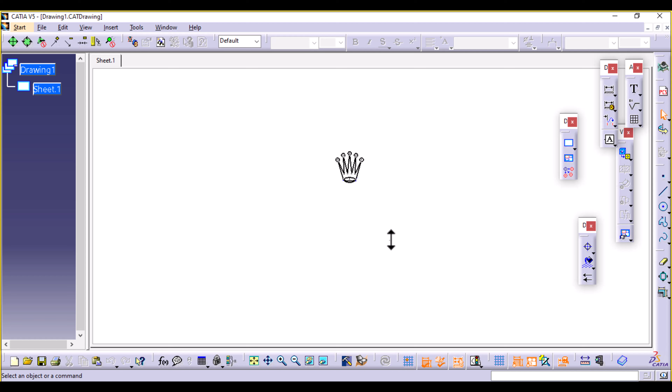So stick around. You're going to open the clasp safety cover. We're going to start there. And we're also going to open the drawing file that we created when we were creating the crown. If you cannot locate it, I would advise you to go back to that tutorial and redraw this.

But if you have it, let's just dive right into it. So here's an image of an actual Air King model. This is the oyster clasp. As you can see, we have this raised part that we need to add. We have this groove and we have these writings which are engraved, as you can see here. And we have Geneva Swiss made. So we're going to make this.

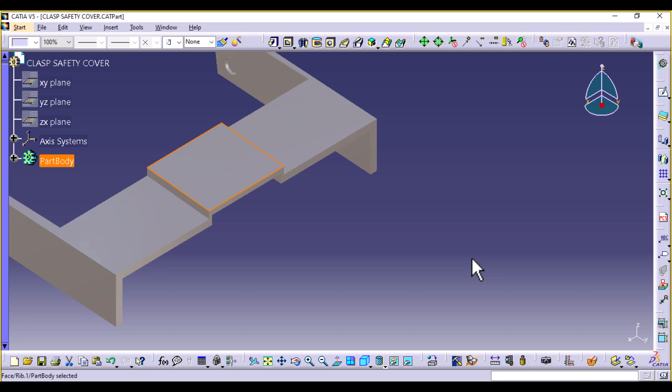Let's start with the safety cover. Now this surface is where we need to make that sketch, but this surface is not planar. If you remember, we created this profile and then swept it over a curved surface. So this surface is actually curved, but you can't see that because it's just a small part of it. And if we need to sketch on it, we have to create a plane here which is tangent to that surface at a particular point, and we're going to make a point in the middle. So I need us to switch to the generative shape design workbench so we can do that.

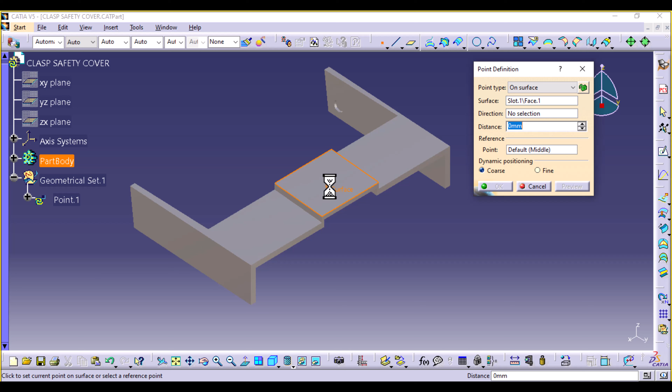We're going to start by creating a point on surface, and you're going to select that surface. Create a point in the middle and select distance to be 0, then select OK. And then we're going to insert a plane tangent to the surface, at this point, and select OK. Now you're going to hide the point.

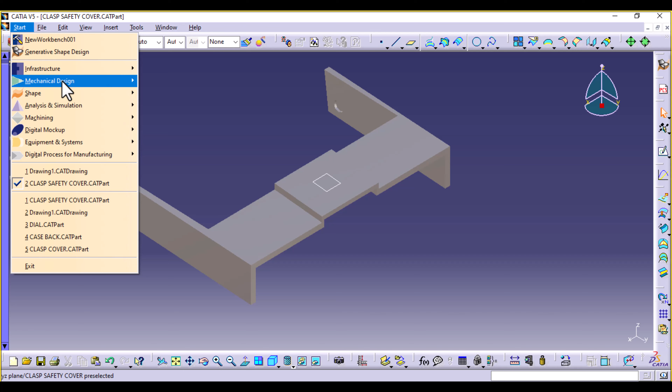And then we're going to switch back to our part design module. Right click on part body and define in work object so that now our new elements are going to fall in part body. Now select this plane and sketch.

Now this is where we're going to paste that crown from drawing 1. So go back to drawing 1 and highlight everything, right click and copy. Go back to the clasp cover, hover over the plane and then paste. Then if you select fit all in, you can see where the new sketch is, and then you can just click on it and drag it all the way close to where our object is.

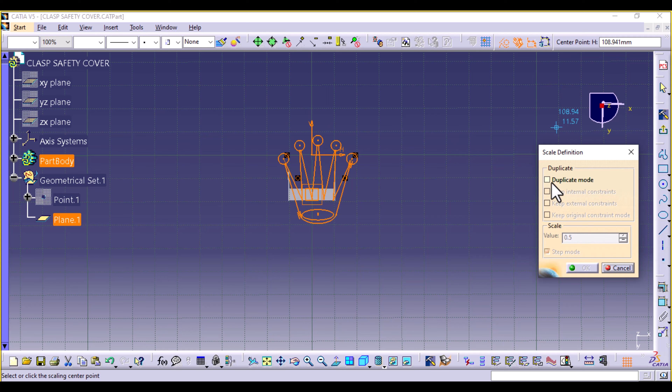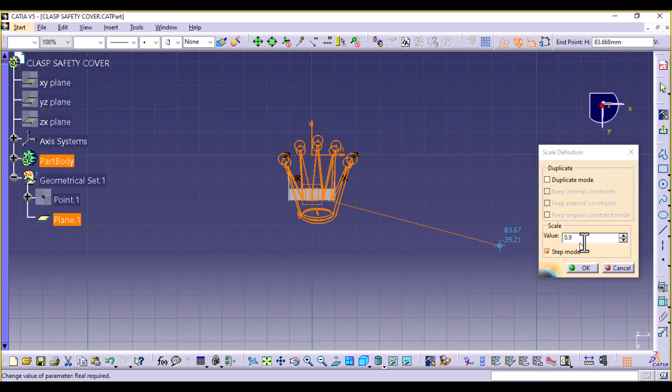Obviously it's too large, so we need to scale that down. You're going to select scale from transformation. Make sure the duplicate mode is deselected, otherwise you're going to end up with double of your sketches every time you perform a scale operation or a rotate operation. Now you're going to select a point where you want your new element to be, and you can scale that down. I'm going to go with 0.9. I can increase it later on if I want. You can see you can drag out and in to select your value, or you can come here and enter your value. In this case, just 0.9.

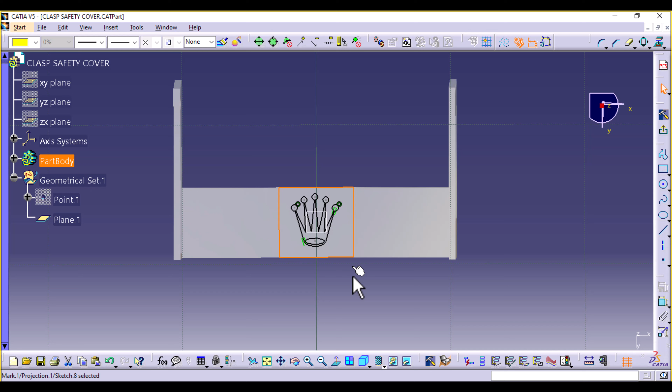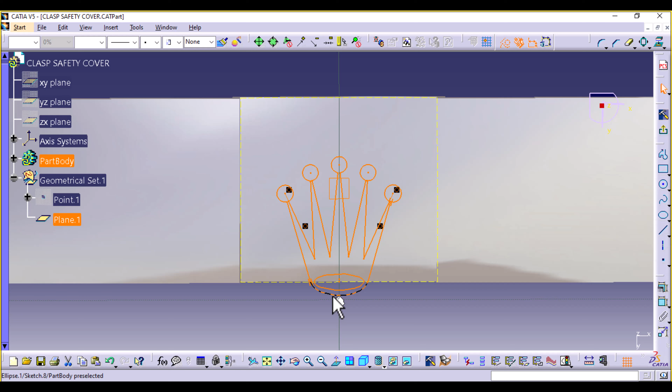Now let's zoom in. So this is the surface where we're going to put this crown. I'm going to project this as a construction element so that we are able to see its boundaries. This is a construction element like so. And then I can now select the sketch and drag it out. So there's just a small portion of it which protrudes outwards, and that is this half ellipse, but it's the only one that's going to be outside. And then there's a bit of distance left on all these sides. I actually think this is good enough for me.

If it's not, you can use scale again to go up and down until you're satisfied with what you have, and then you can exit the workbench. Now I'm going to hide this plane.

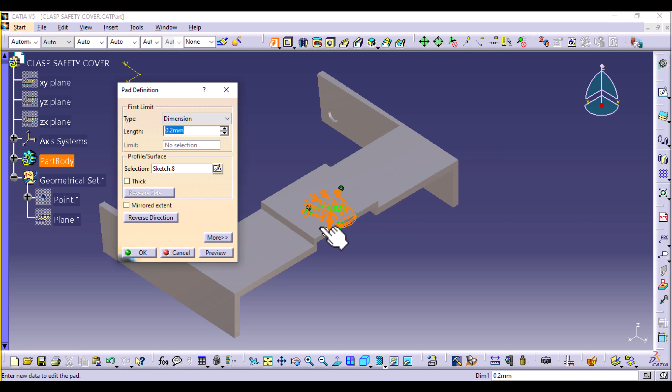And then we're going to create a pad. The length is going to be 0.2, and this is going to be your sketch. Make sure the direction is going upwards, not downwards. And then select OK.

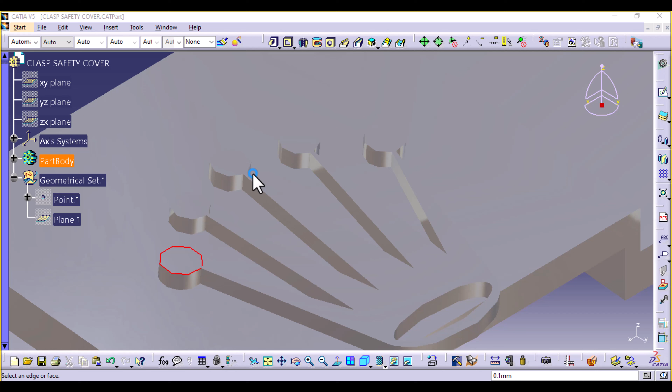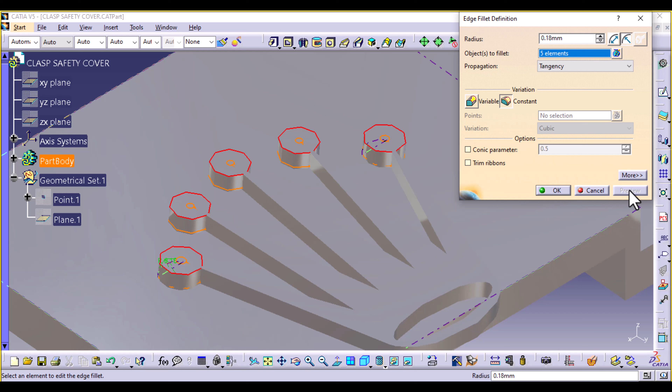0.18, we're going to go with radius, not chordal. Preview. Let's try that. And voila, we have that.

If you're able to add more fillets, you can, because they need to look as rounded as possible. But you have to understand that this is quite a very small feature, so it might prove difficult to create those fillets.

Let's try this one, these 2 sides. Let's say 0.01. Make that chordal length, and then trim ribbons. Preview. Select OK.

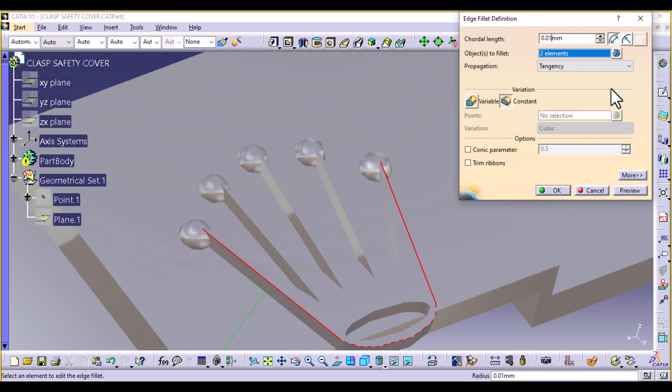If it can't go 0.01, then there's no point in creating the fillets. Okay, we're just going to leave it as it is actually.

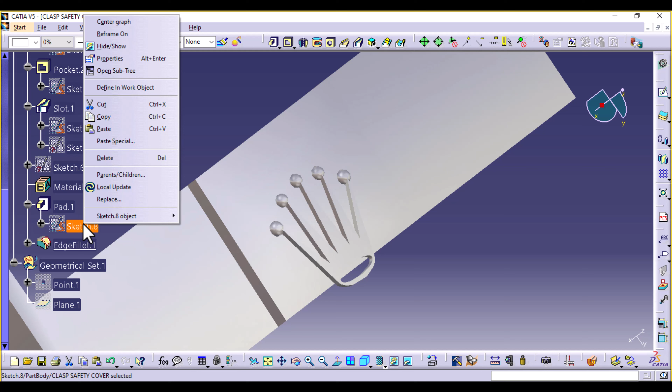Now, one thing to note is that it's not completely hollow, so it's like we have a pocket here. So we're going to select that sketch once again, sketch 8, copy and paste it once again in part body so that it comes here as sketch 9.

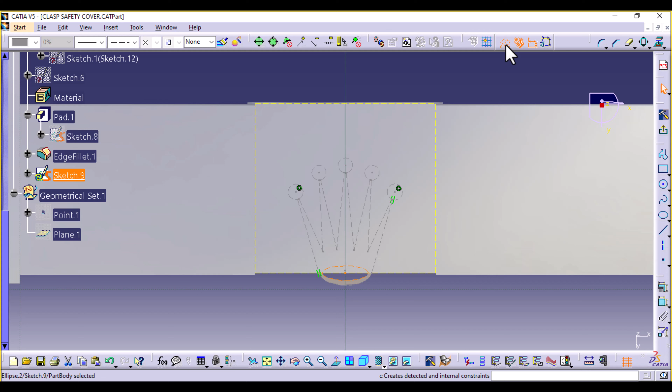Double click on it. You're going to highlight everything and make that a construction element, and then select the ellipse and only make that a standard element. Then exit the workbench, then create a pad, reverse the direction so it's going upwards, and then

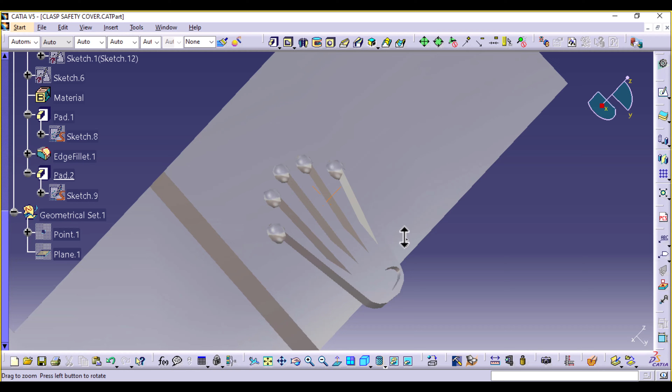there's going to be 0.1 so that it appears like we have a small pocket. Nice. I'm actually going to leave it as that.

If you're able to apply more fillets to these sharp edges, you can do that, but that's fine by me. So this is the part you use to lift off this safety cover and to separate it from the cover, as we saw when we were creating the assembly.

Once we close, it's hard to see where what ends and what starts. So you're going to save your work.

And then we're going to go to the next clasp cover. So you're going to File, Open, Clasp Cover.

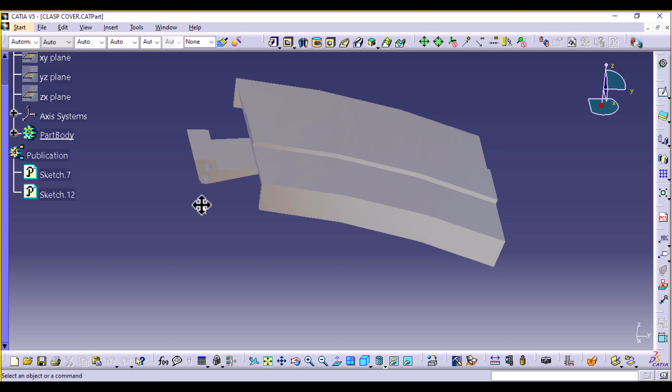The job is pretty simple. We just need to select this face and sketch it.

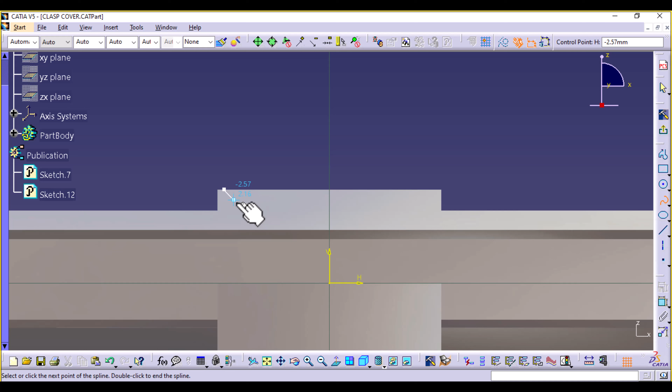Select spline. You can zoom in. And then close to the end, you're just going to click right there and create

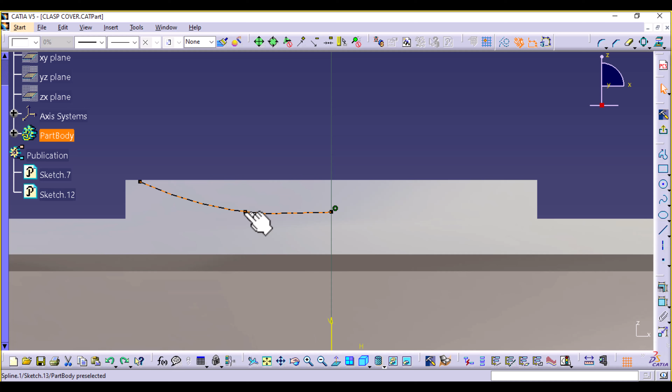a profile like so. Escape. I'm going to raise this so it's a little bit upwards.

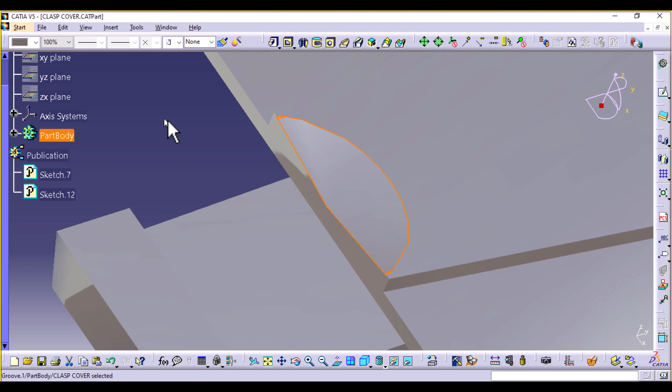and groove it for 360 or 180, and then select OK. And you should have that groove where now that raised logo is going to sit, so that you can have access when you're opening the safety cover. That's pretty simple.

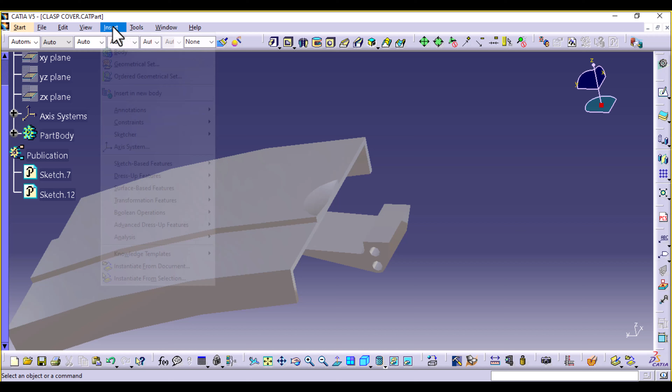So for both of them, you're going to add some fillets to the sides. Insert edge fillet, and I'm just going to select—I'm not going to select this side, this corner. I'm just going to go with these bottom ones and the sides.

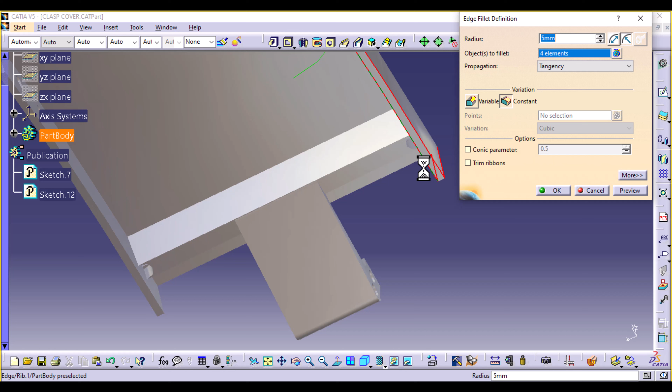The sides. And we're also going to select the front and the back. The side ones are the length, this corner is the only one we're not going to select.

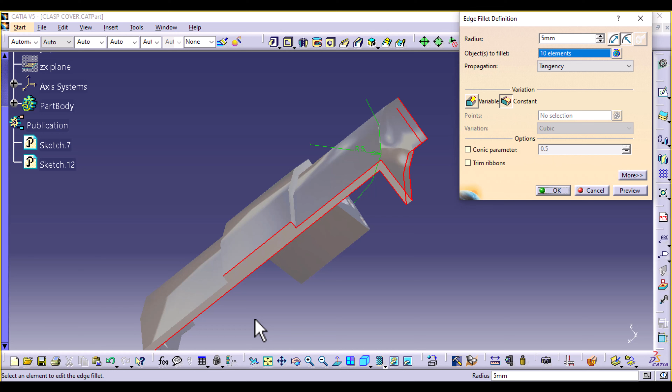But all these other ones, just select.

Make sure you're selecting the edges and you don't select any face. You can confirm that from this list of elements.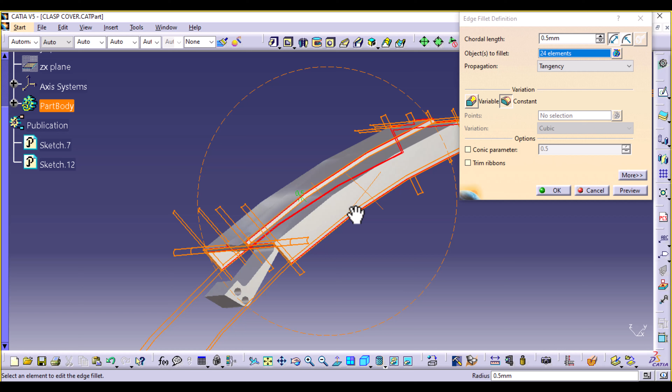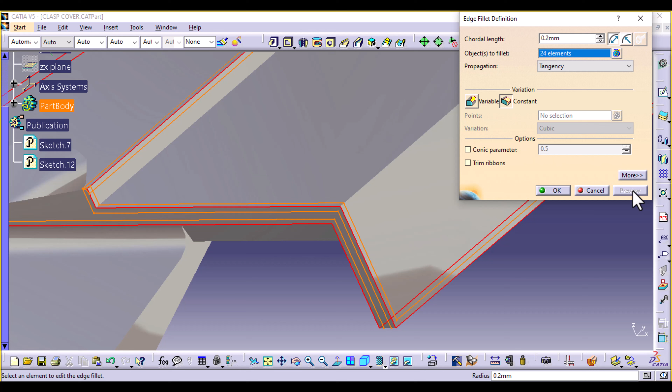Let's start with 0.1. You can zoom in to see how much you're filleting. 0.1, let me see 0.2. I'm going to go with 0.2 because they need to look rounded.

We need smooth rounded edges, and we're going to do the same for the cover, the safety cover. So save this.

So for this one as well, we're going to do the same. Insert, select edge fillet, and then select once again all this front. That's a face, I'm going to undo that. Okay.

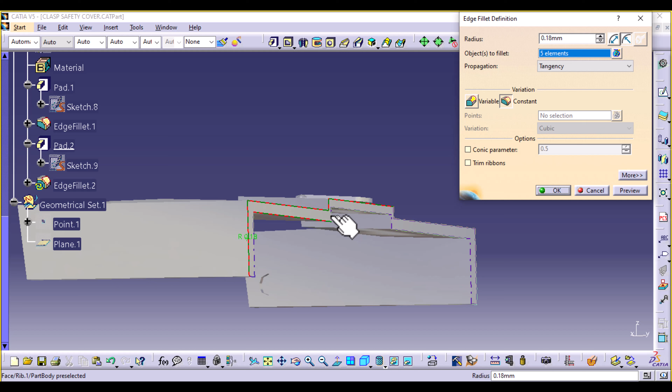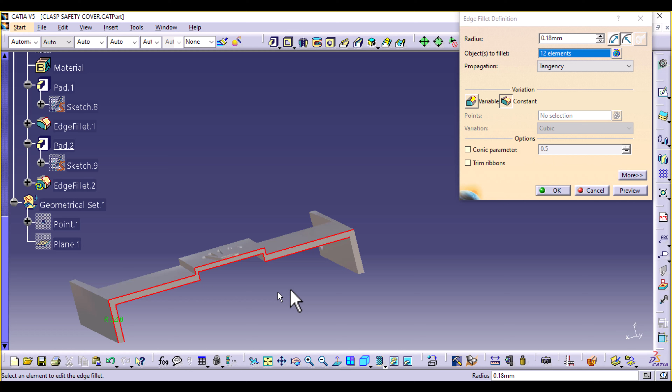You can fast forward this part if you want. So we got the front part. Let's select these edges at the bottom. Then go to the back and select these height edges.

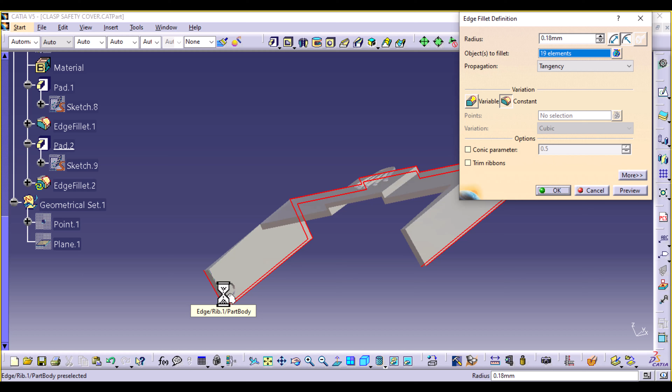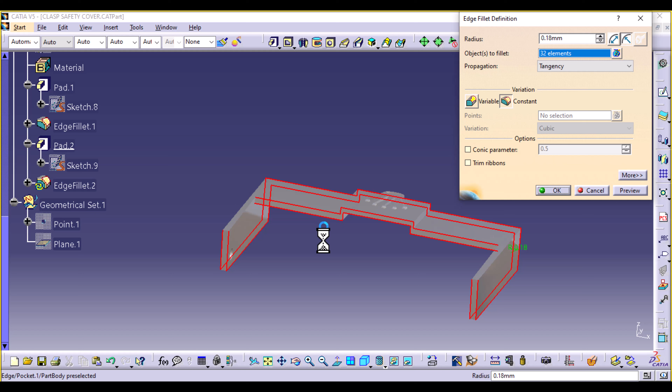All right, I'm going to go with those. So once again, it's 0.2. You can zoom in to check. And then select OK.

Let's try 0.15. I don't know if there's something I've said. Oh, let's select chordal length instead of radius. And tie that point 2 once again.

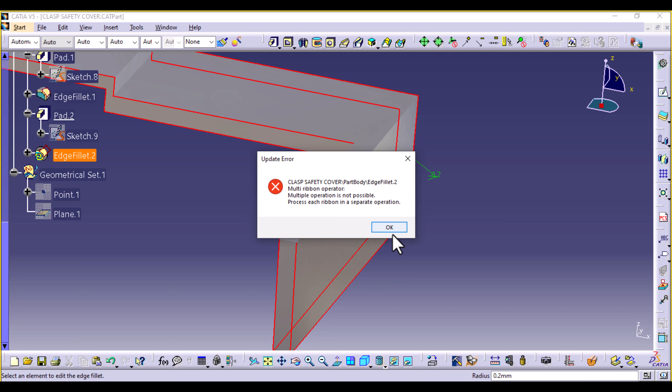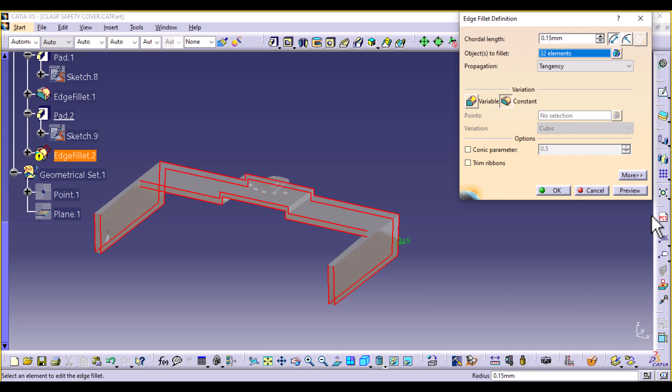I'm pretty sure I've selected the edges only, don't know why it's not working out. So 0.15 chordal length. Okay, that's worked. 0.15 worked, and it's looking good. So save that.

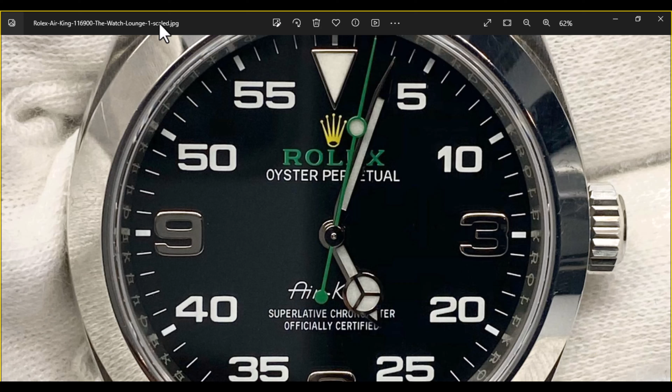Now for the middle case, we have the word Rolex going all the way around. I don't know if I have an image of that, let me check and pull it up. So I've got this image here, and this is what I'm talking about. We have this Rolex word going all the way around the complete circumference, right above the dial, between the dial and the crystal gasket on the middle case.

So let's do that. We cannot find the exact font, but we can find one that looks pretty much alike. On this drawing, you're going to select text and then select a point, say about this point. All caps, you're going to write the word Rolex, enter.

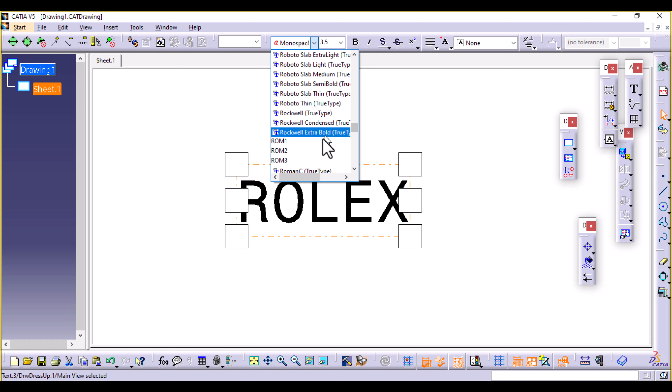And then we need to change the font to something which looks similar to that. So you're going to select Rockwell, Rockwell True Type. And then you're going to save this as an AutoCAD drawing, select DXF and save.

Now if you go to File and open this drawing, you can see this is now an AutoCAD drawing interchange instead of a CATIA drawing, so DXF. If you open that, it should convert the word to a sketch.

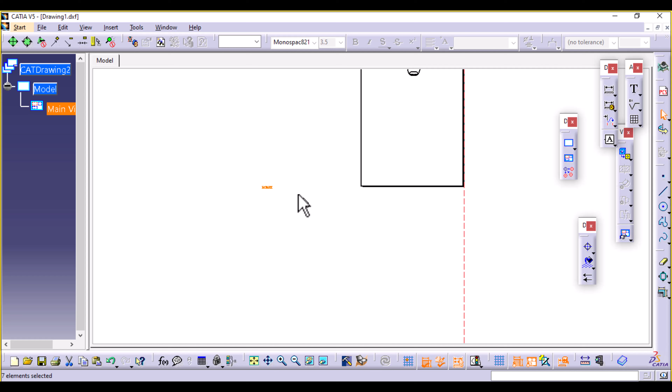So we're going to zoom in here, and this is what we have. You can highlight this and try to move it. Oh, it's disappearing on me. I want to move it to the middle of the page so I don't have trouble finding it. So here it is.

It's very, very tiny, I hope I will be able to find it. Okay, Rolex. So you're going to highlight that, copy, and then open middle case.

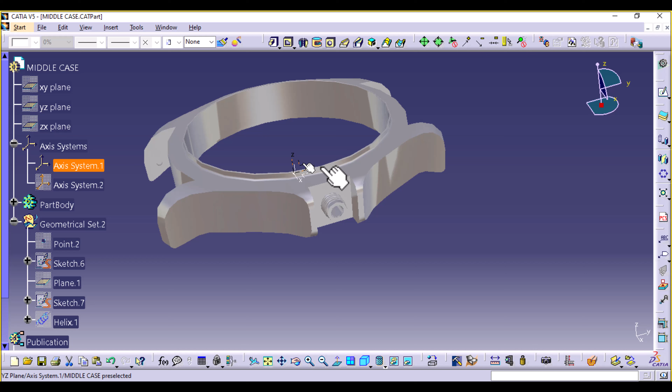Then you're going to show the initial axis system that we had, the first one. Select the YZ plane and sketch. I'm going to try and bring it right here in the middle so I can see the position well. And then I'm going to paste.

Then fit all in, you can see it here. I'm going to drag it all the way next to our geometry. Then you can zoom in. This is obviously too large, so we're going to scale that down.

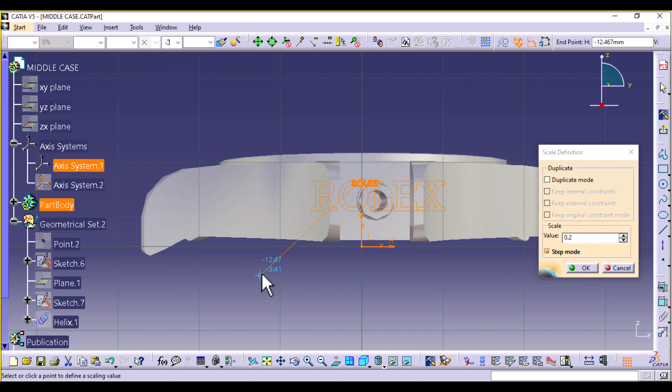Scale it down, I'm going to select this point. 0.5, 0.2... I'm thinking about 0.3, 0.3, yeah 0.3. And then I'm going to move it about this point right there. You can always come back and adjust that.

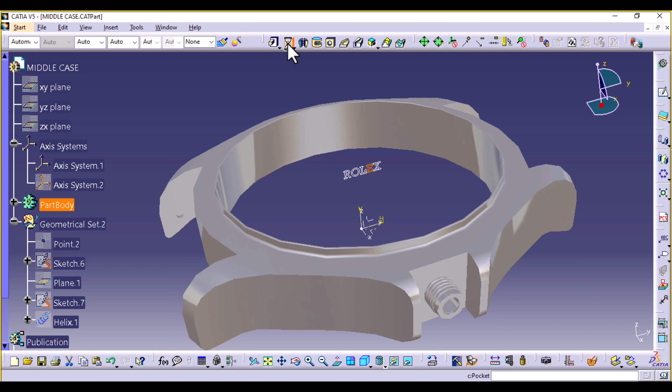So we're going to select this sketch and create a pocket. That's the direction. So our inner diameter was 34, that means the radius is 17.

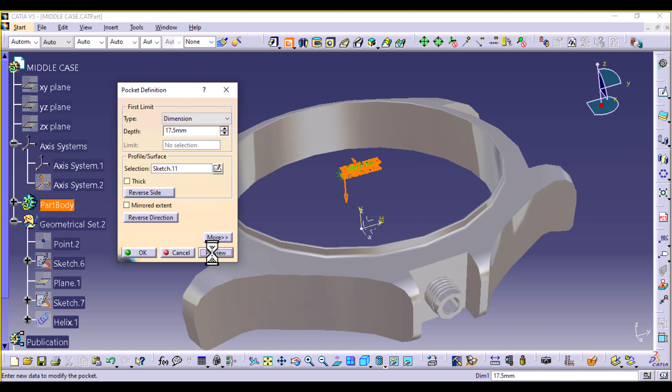So we can make this 17.5. 17.5, preview. Select OK. So this is what we have.

Now before we make this a pattern, we need first to check from the assembly if it's sitting above the dial, because it should sit above the dial. So you can go to File and open Assembly 1. And if you zoom in, you can see the word, and it should sit above the dial.

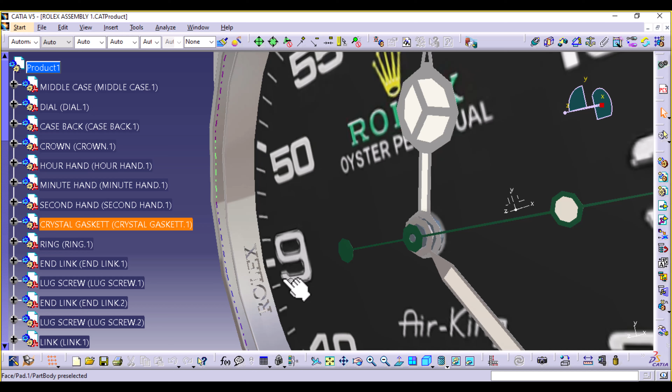So if you see it's too low, you can go to the sketch and bring it up a little bit. If you find it's too high, you can go back to sketch and drag it down a little bit until you find a position where it's sitting right above the dial. And this is the word, so this is okay.

We don't need to save that in the meantime. Now we're going to create the circular pattern. Go to transformation features and select circular pattern.

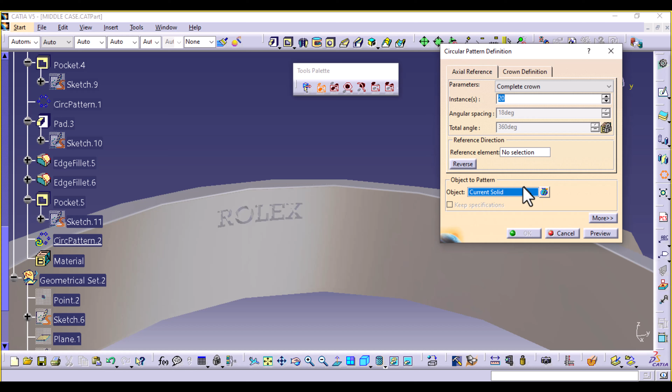We're going to select a complete crown. 51 is a bit too much, so you can start with 20. The object to pattern is going to be the pocket you just created—that was pocket 5. The reference element, or direction axis, is going to be the Z axis.

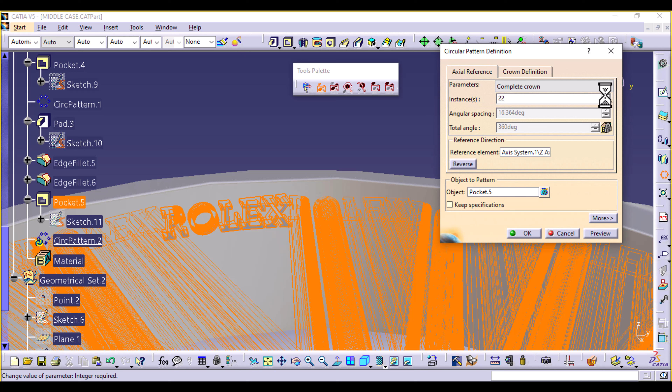Before you save, zoom in, and it needs to blend in like it's a continuous word. So you can try increasing the number slightly. That's 22, let's try 21 first. It doesn't have to be all continuous.

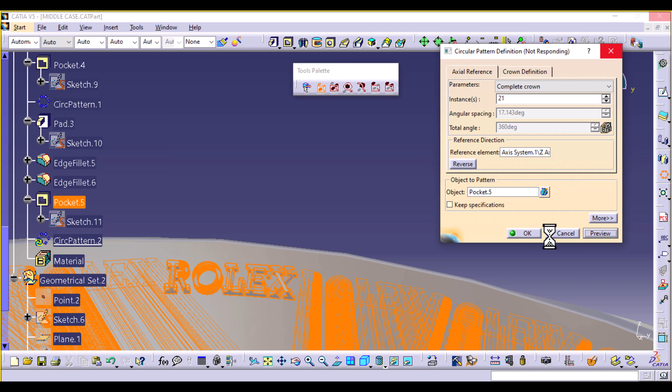My machine doesn't feel like doing this. It's okay, so 21, select OK. I think that's okay. Then you're just going to hide this axis system.

And save your work. You can close this. Leave the drawing first—let's close this as well. Close the DXF, select yes. Actually, no, I don't have to save this. Okay, let's save it, let's save it. CATIA drawing 2, save.

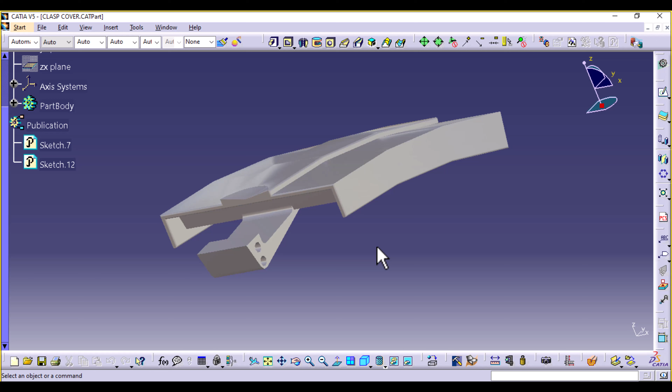We can close this as well. We are done with this, the clasp cover. So the last thing is the blade, the bottom blade. We're going to open the clasp blade 1.

This one, and we just need to make now that logo. We need to draw this. So we have the word Rolex, we have the crown. All we need is to make these curves right here, and then Geneva Swiss made. That's okay.

So we need to bring in an image. What you can do is search an image online, or you can work with—I don't know if I should attach this, or I have another one. Let me show you.

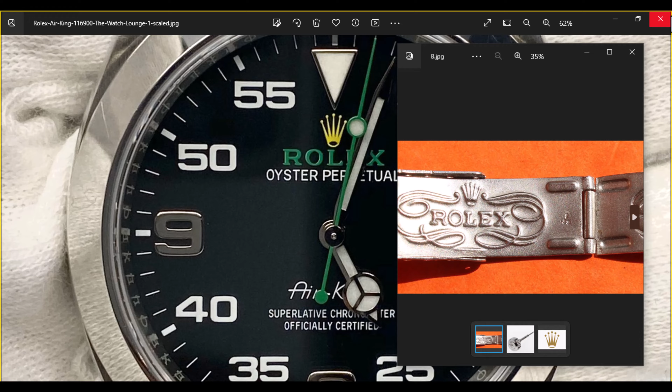I'm going to attach this right here on YouTube so that you can download it and use it to draw out these curves, the splines. So we have the word Rolex crown here, and we have these curves—they are 1, 2, and 3. Then we have this in the middle. We can just mirror this along a vertical axis right here.

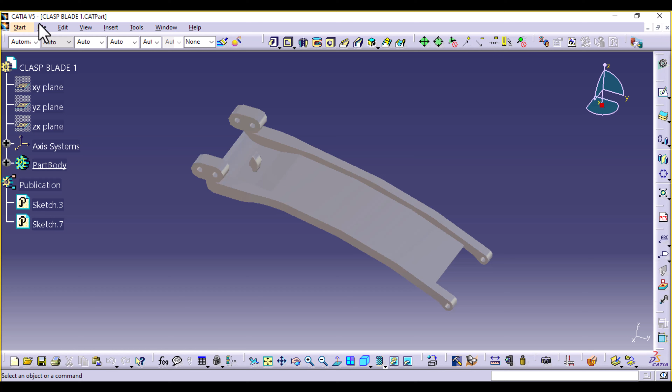So what I'm going to do is open the same drawing file. We have this drawing1.dxf, the last one that we used. Okay, it has the crown and it has the word Rolex. But to draw on this, remember: you draw on the CATIA drawing and then you save it as an AutoCAD drawing, okay.

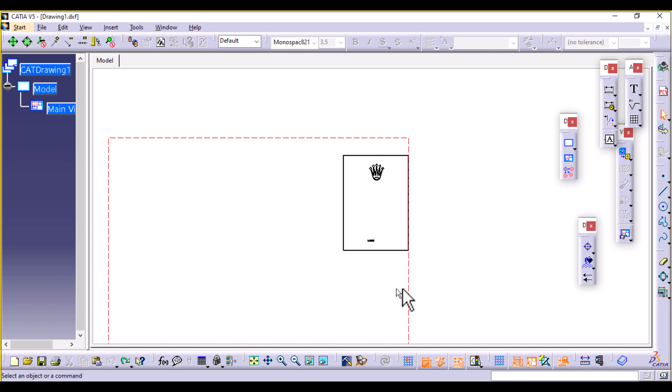Before I make any changes, I need to fix everything together because we don't have any constraints here. So I'm going to select this and then select fix so that everything doesn't move, right? And then we have this word—I'm going to move it up here first. Let's put it up there.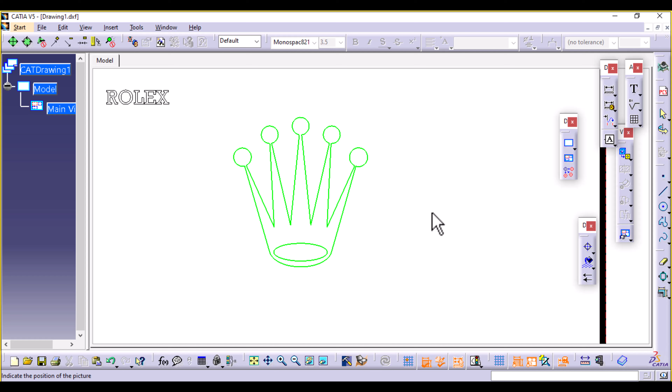Zoom in, and we're going to bring in an image. So insert picture, and then that picture that I just showed you, that's what you're going to attach here from the desktop. Have this—I'm going to bring it right here. I can maybe make it smaller.

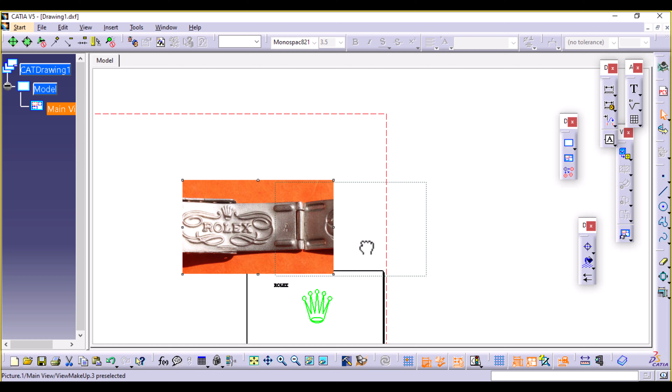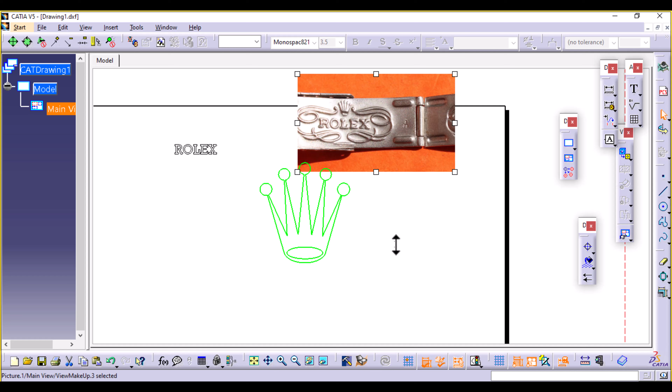So we need to make these curves. Okay, zoom in. I can place it on the side actually, it's going to be easier. Like that—it's starting from the side here. We make some curve, we're going to start with this top one here. You're going to select spline.

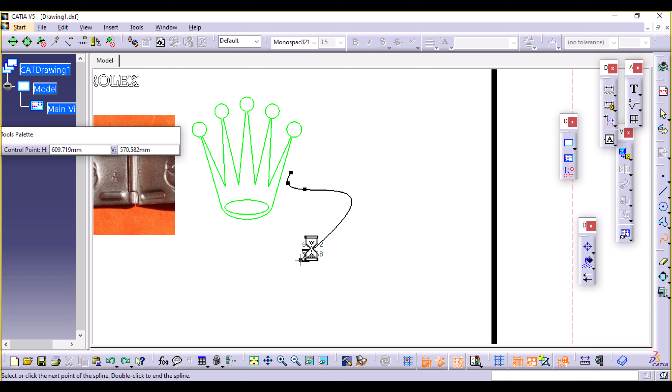And from this point, don't worry too much because you can always edit this thing. You're just going to freestyle something close to what we are seeing.

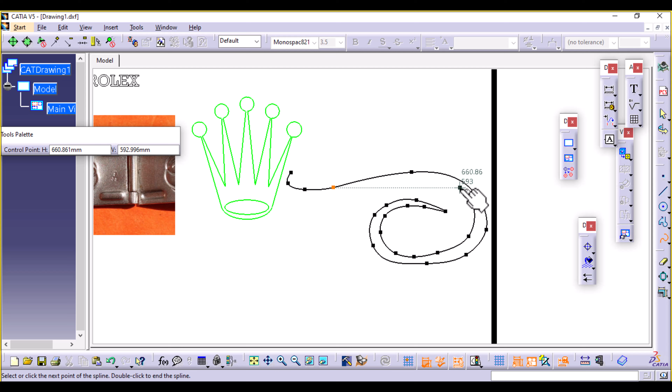So I just need to trace it as close as possible to the original one.

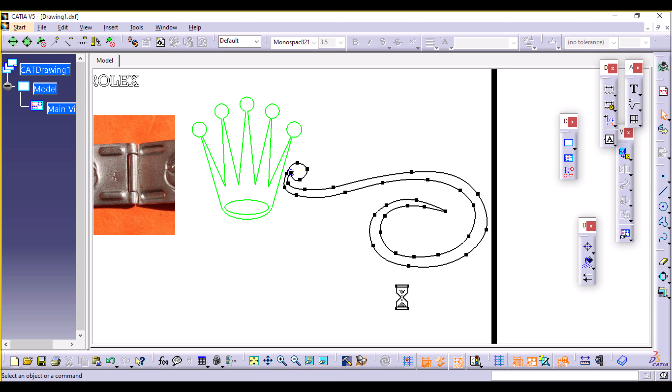So if you hover over one of the points, make sure that only one point is selected. You can move it—if it's everything that is highlighted, then you're moving the whole thing. So you can adjust it to fit the curvature.

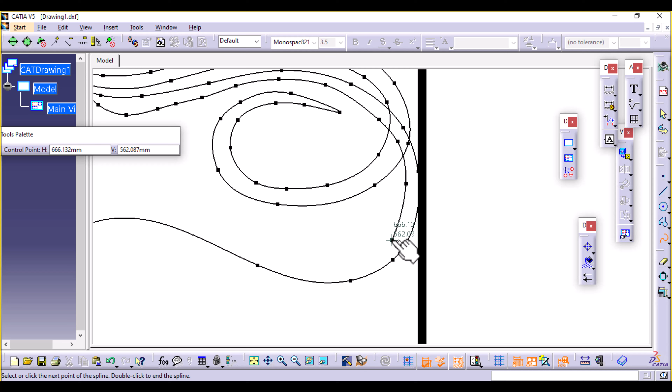By double clicking on this—so perhaps I should mention that.

So I don't know, something like that, doesn't have to be perfect.

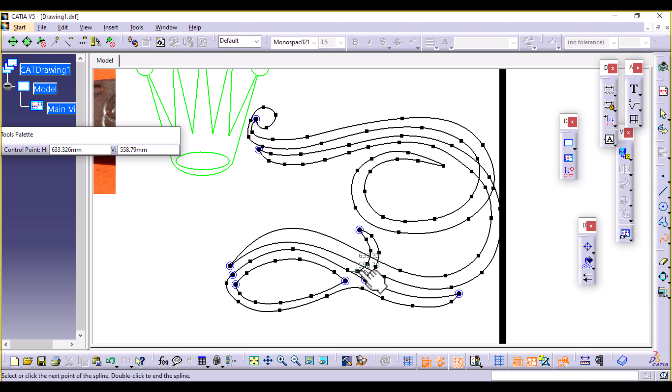I'm just going to leave it as that. It's not an essential part of the design anyway, it's just for decorations.

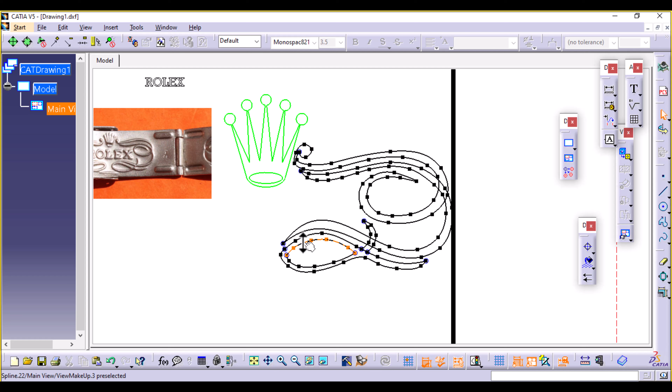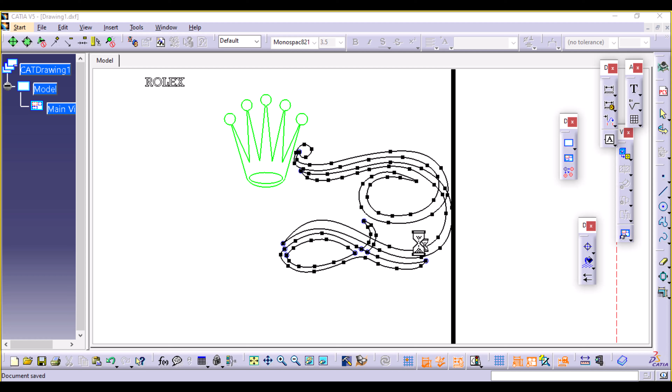We can now delete this image, and then you're going to save your work, of course, as a DXF file, the AutoCAD drawing, so that you can convert it to a sketch. But unfortunately, we are out of time, so we're going to have to split this into two parts, so I'll catch you in the next episode.